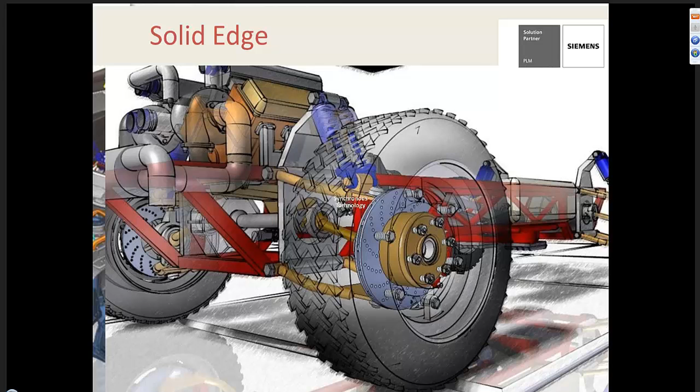Solid Edge, while a complete 2D to 3D CAD solution, is different from other systems you may be familiar with. We offer synchronous technology for accelerated design, faster revisions, and better reuse of imported data, and many other areas like production-driven drafting, integrated analysis, and a full suite of products within the Velocity series to help you improve your complete manufacturing process.

So I wanted to take a look at synchronous technology. Of the technologies available, we're most familiar with history-based modeling. They use a feature-based approach for create and edit and generally are dimension-driven, so automating model changes are reliable and predictable. However, achieving any predictability requires a tremendous amount of flexibility in planning out how to edit is going to happen. Any changes outside the planned modification results in a tremendous amount of rework, and we all know the performance issues that this technology suffers from.

On the other hand, there are history-free modeling systems, also called explicit modelers. They are featureless and offer little in terms of automated design with dimensions or relationships. They are fast and flexible and accommodate a wide variety of changes, assuming the proprietary geometry kernel can handle such modifications. So with synchronous technology in Solid Edge, it incorporates the best of both worlds by combining the speed and flexibility of an explicit model and the precise control of parameterized modeling design.

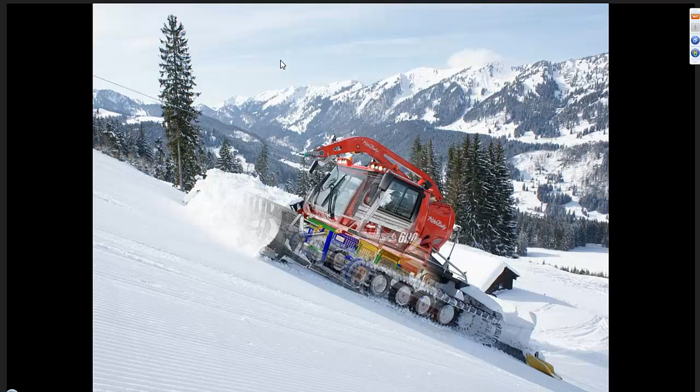I can see your screen, Kevin. Go ahead.

Okay, great. What we're going to do today is go through an overview of Solid Edge and talk about the points that Amy had mentioned this morning about being able to accelerate your design, make very fast revisions, and also show you how you can reuse data from other CAD systems.

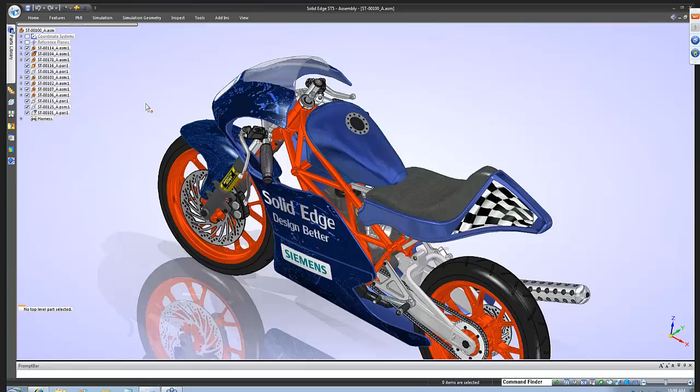We're going to be utilizing this motorcycle as the basis of our demonstration this morning. This particular motorcycle is a real motorcycle that was designed at a local community college over in Spain. Today we'll show you some of the tools Amy mentioned, like synchronous technology, working in the context of the assembly, modeling components, and then showing how you can create your detailed 2D drawings. Solid Edge has some very extensive rendering tools to create photorealistic images of the models you create.

You'll notice you can get nice things such as reflections. You can also apply realistic textures to your models as well. These can be very handy when you're creating documentation or manuals within your company.

What we're going to do today as well is show you how you can work within the context of the assembly. Solid Edge has some really great tools for when you need to display specific components. What I'm going to do right now is show you the framing components and turn off the other parts that I don't need to see at this time.

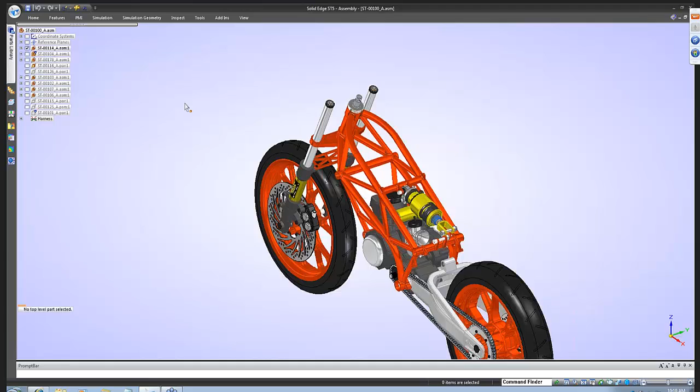This is going to help us in the design process of modeling the yoke for our front forks. You'll notice I can go into the context of the assembly to start creating these modeling components.

You'll notice we can display them as a reference, and as I mentioned before, we're going to design the yoke here for the front forks and utilize synchronous technology to do that.

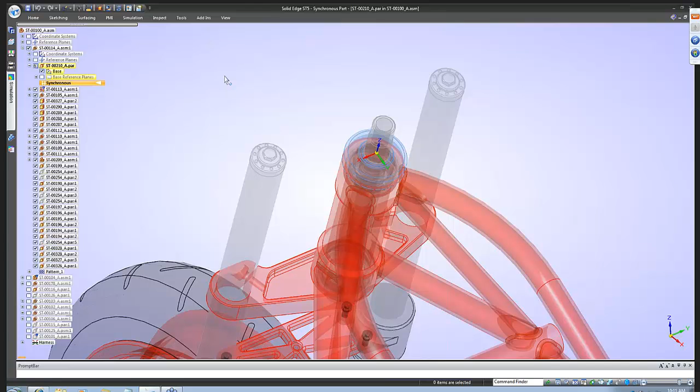What's nice about being able to design in the context of the assembly is we can reference locations of other parts to make sure we're designing this so it fits in the context of the assembly. So notice how I can reference geometry from these existing components.

At any time, I can turn off the display of our components and just focus on the design at hand. 2D users are very used to designing and placing dimensional information on their 2D geometry. I can also not only reference that, but place dimensional information relative to it as well.

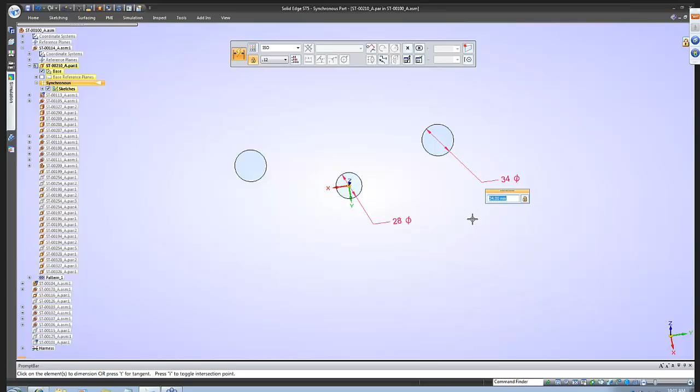Notice how, utilizing the same dimensioning tool, I can place different types of dimensions. For example, I've placed two diameters for the locating circles of the mounting holes, but I can also use that same tool to place locating dimensions. That's very flexible about the system, not having to select different commands to do the same thing. We'll place one more locating dimension to specify the distance between the two front forks.

We can also create additional detail as we go through and create additional geometry. Notice as I right click on the screen, I have access to 16 different commands that I use very commonly. You'll notice I can access the circular command to place additional geometry, and we can go through very easily and snap that geometry to existing geometry to create additional detail.

I'm going to place two more circles on top of our existing geometry, and notice how they not only snap down but also create the appropriate dimensional information for that geometry.

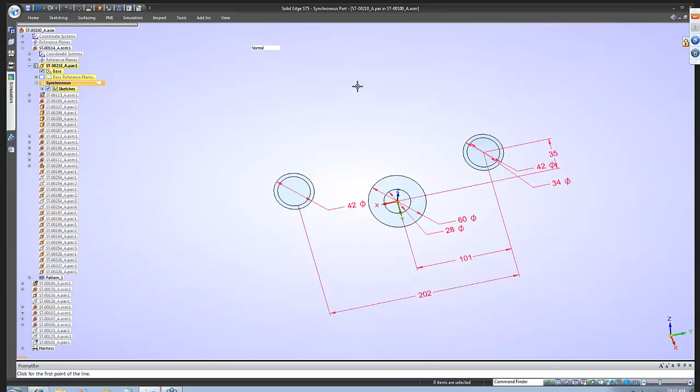We'll place some additional elements to help us in the design of our part. As you're creating geometry inside of Solid Edge, you get instant feedback on the screen, so I can tell, for example, when I'm touching other geometry. I can also tell if I'm tangent or related to other geometry in different ways. You can see here I'm touching and tangent to the circle, which allows for very fast, flexible 2D geometry creation.

We'll do one more element here, and again you'll notice how I can snap down to the circle. What I'm going to do purposely is make that tangent to the circle, but have the geometry fall off of the circle and not make it precise, and you'll see why I can do that here in a minute with Solid Edge.

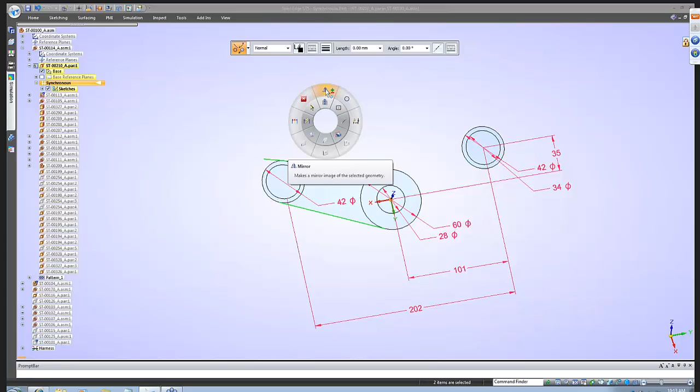I want to take this geometry I just created and mirror it over to the other side. Again, these are very common tools when creating 2D geometry—not only being able to create it, but also do things like mirror it over to the other side very easily. Let me grab that geometry, and we'll mirror it about the XY plane, or the Y axis, I should say.

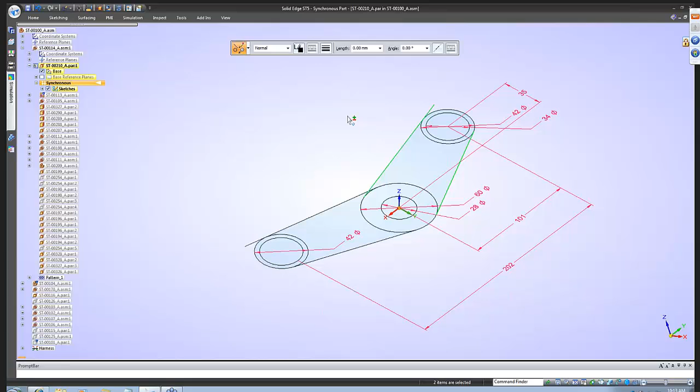What we've done with synchronous technology is we've incorporated what we call a region concept. So I've got the 2D geometry created, and I can select the geometry very easily and specify that I want to take this and extrude it some distance. Notice how as I grab the region, even though those lines aren't connected up there at the top, I can just specify that I want to extrude those down 25 millimeters, and Solid Edge will automatically trim that geometry for me.

So it's very easy to create, very fast and flexible to create that geometry as well, and get it to do exactly what I want it to do. You'll also notice that the 2D dimensional information that we placed on the geometry automatically connects itself to the 3D model, and you'll see why that's important here in just a few minutes. For now, I'm just going to turn off the display of those dimensions and focus again on my design for the yoke.

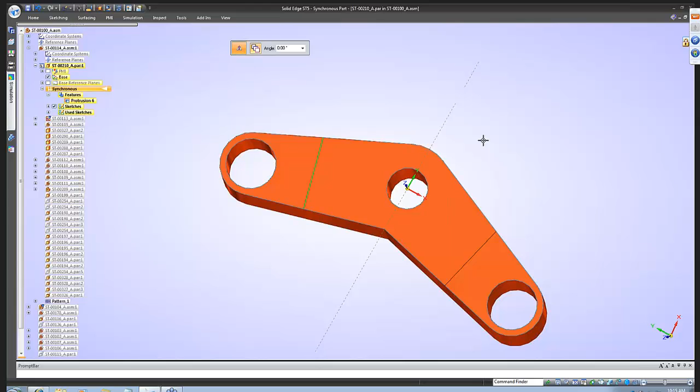Again, I want to create some additional geometry. This time I'm going to do it directly on the part. And again, you'll see how we can easily detect where this geometry is relative to other elements. You can see in this case I'm perpendicular to that element. And I also want to go through and just mirror this over to the other side as well, about the y-axis this way. Again, it creates that region, and what I want to do is take the middle portion of this and just extend it up. I just simply select the region and specify that I want to extrude that up, in this case 30 millimeters. And you can see I'm starting again to create some additional geometry for my design.

I want to do a very similar thing on the bottom side, and again I can borrow geometry that exists already just by simply selecting it. So in this case, we'll come up and select the geometry we just created and copy that to the bottom face. And again, that gives me the ability to take that region and either add additional material by moving my mouse cursor down, or if I extend it into the part, notice how Solid Edge will remove that material automatically for me.

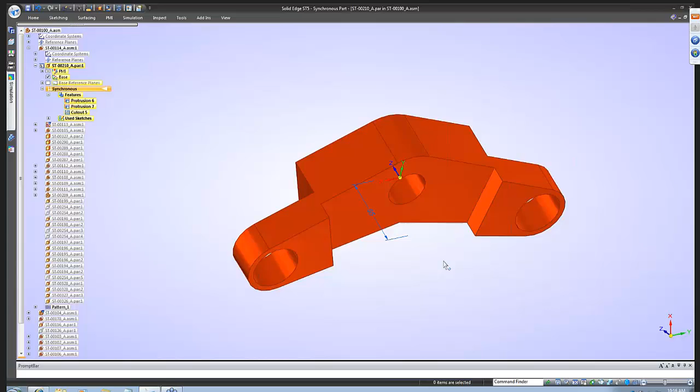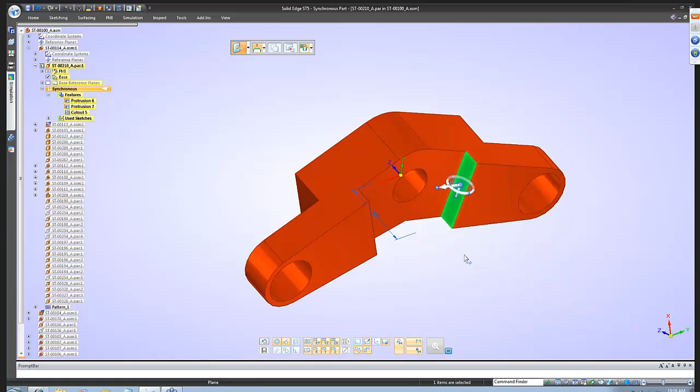What's nice too about utilizing synchronous technology is we don't have to concern ourselves with how we've modeled the part up to this point. We have direct interaction with the model. So you'll notice in this case, maybe I want this cut out here on the bottom section of our yoke to be a little bit smaller in width. So I can easily just take the face there and just simply grab it and extrude it in. Notice how on the opposite side it's recognizing that we have symmetry in our model. So I can go ahead and extrude that simultaneously just by simply selecting the face and pushing it over.

I can also come in at any point in time and place dimensional information on the part. So maybe in this case I want that to be 25 millimeters. So at any point I can place the dimension on the model directly and have it be the values that I've specified.

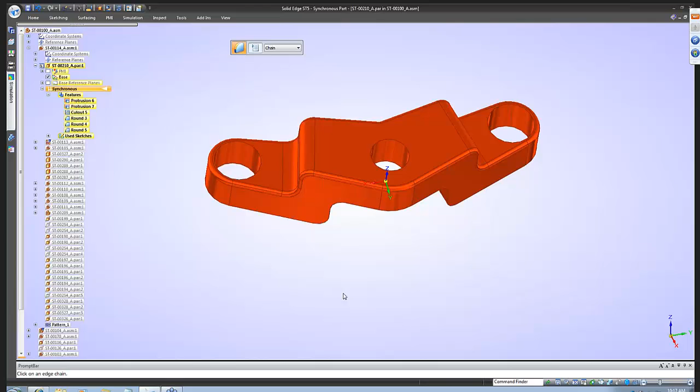So we have the basis of our design. Let's go ahead and add some additional detail. Obviously we don't want those sharp edges. We can go through and just start selecting edges and rounding them to values that we want them to be. In this case we'll make those 10 millimeters. We'll do the same thing here on the outside. And then as opposed to just individually picking edges, I can also pick a chain of edges and have those round as well. You'll notice how it goes around the entire perimeter of that upper edge.

So we've rounded our edges, but as I look at the part, you'll notice that it's very orthogonal. I might want to add a little bit of taper or a little bit of draft to the part. What's nice, again, with Solid Edge is I can just grab elements off of the model and utilize this editing tool. You'll notice it looks kind of like a steering wheel. I can grab it and place it at any location on my model and start editing the geometry. So maybe in this case I want to add a little bit of taper to those edges.

As I grab just those two single faces, notice how it recognizes symmetry with our live rules. So maybe I want to add a 20-degree taper to those walls. And as I look at this, maybe we have a little too much clearance here in the middle.

So I may want to take that and make it a little less of a clearance there. I can grab that geometry and just push those faces towards the middle, without having to be concerned with how I modeled that part originally. It gives me direct interaction with the part.

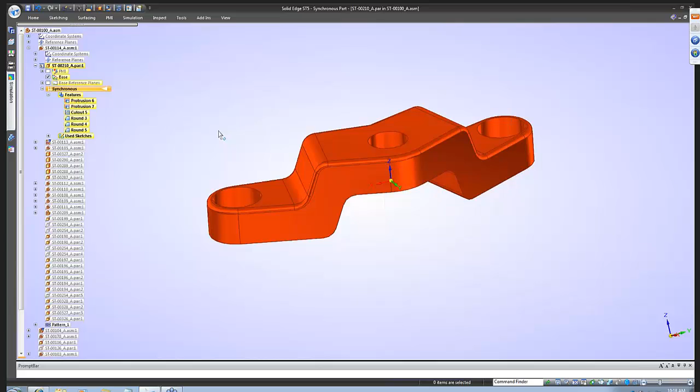Now the other thing in regards to modeling components is I may want to specify what this is made out of. Solid Edge comes with an extensive library of materials, so maybe in this case I want to make this out of aluminum.

All of the material properties are associated with the list of materials, and densities, specific heats, all the items you see listed here are automatically applied to that material, and that's going to help us in detecting things such as weight.

You'll also notice we come with different properties. So if you want to specify specific information about this part, for example we're calling this the fork yoke, you can also key in other information such as who the author or designer is of this component, and project information such as document number, revision levels, project names.

You can also specify how you want to detect things such as weight. How do I want to look at this? Maybe I want to calculate the weight of this part in pounds as opposed to kilograms. So you can change any of this information on the fly.

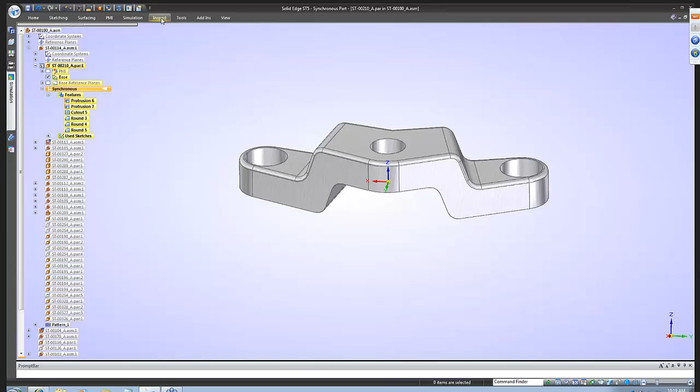Having done that, we'll go ahead and look at the properties of this part, and you can see at this point we've got a mass of just a little under 2 pounds for this particular part, calculated based on the material specification.

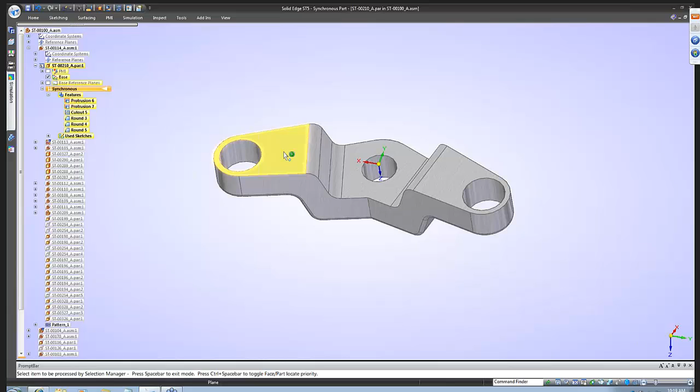That weight is a little too high. We might want to go through and remove some of the weight off of this part. So very easily I can tell Solid Edge to get rid of that. I'm just going to select the bottom faces of the part, and I just want to remove all of the internal material.

What's also nice about Solid Edge is if you come from another CAD system and know terminology, you can say to yourself, well, I just want to shell out this particular part. If you're familiar with terminology from other CAD systems, you can utilize the terms you're familiar with.

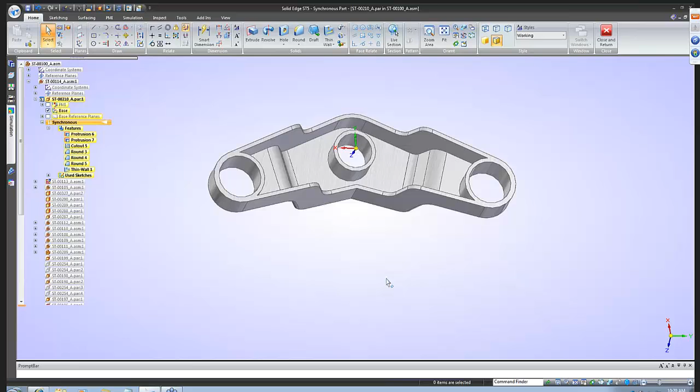Notice at the bottom of the screen I'm typing the word shell. Solid Edge doesn't have a specific command called shell, but it recognizes that terminology and finds the appropriate command. In this case, it recognizes that I want to do what we call a thin wall. Notice how not only does it find it, but it also executes that command simply by picking on the found command, and it does exactly what we want it to do.

Having done that, I can now see, having removed that internal material, we've got a mass of just over half a pound, which is a lot closer to where we want it to be. I'm going to close out and go back to the assembly.

We can go ahead and look at how our part is interacting with the rest of the assembly, and we can see we've got some good fit here. Let's look underneath, and as we zoom in, we may want to make some changes to our part. What's nice about Solid Edge is we can do that right from the context of the assembly.

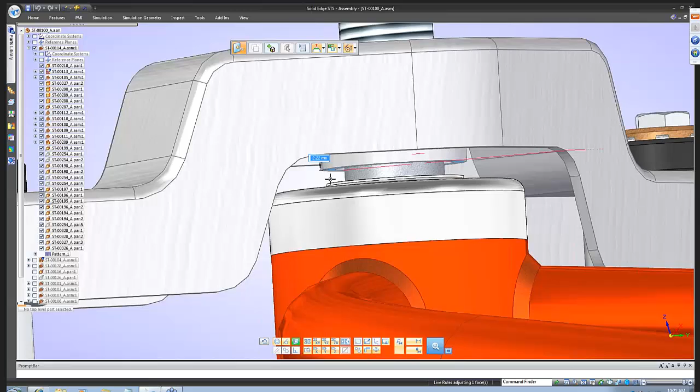So I may want to extend this internal boss down a little bit. Notice I can grab the face right here from the assembly and tell Solid Edge I want to extend that down. I can grab key points off of other geometry, so I'm just going to grab the center point of that upper circle, and I can modify the part right here from the context of the assembly. Let's zoom up a little more on the top level here.

You can see in this case our hole might be a little bit too big for the center post here, and I can get information off of other components as well by simply tagging them. We can see that the diameter of this stem here is about 22 millimeters, and if I select the hole in our part, you can see that that's 28.

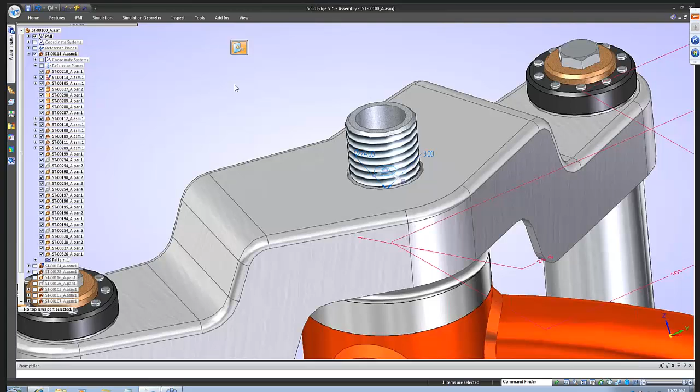It's probably a little bit too big, so again, I can modify this part very easily right here from the context of the assembly. We'll go ahead and save this part.

What's also nice about Solid Edge is we have the ability to do simulation. We can specify, is this part really going to work? What's going to happen to this part in normal operating conditions? What I can do very easily is start doing some simulation or finite element analysis on this part.

Let's go ahead and open up this part by itself. What Solid Edge has is a built-in tool called Solid Edge Simulation. It's going to allow us to do a lot of different work to this part, do the analysis to make sure it's not going to fail out in the field.

Before I do that, I'm going to go through and place a couple of chamfers on these upper edges of these holes. So let's grab this upper edge here as well as this one over on this side, and we'll go ahead and add those chamfers there. So as we look again towards the inside, now that we've shelled out the material, we might want to check to make sure that this part's not going to fail.

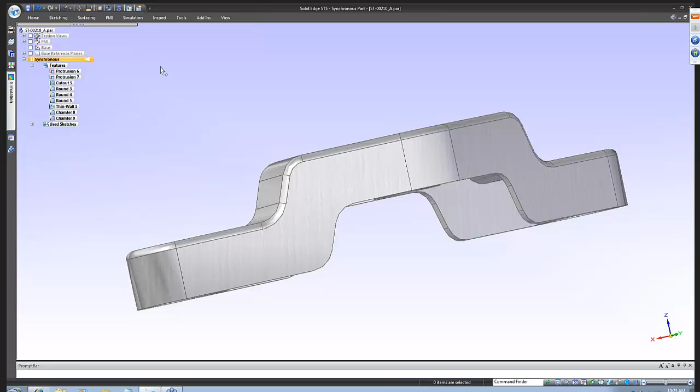We might want to check to make sure that this part's not going to fail, so I can do some simulation very easily on this part.

As we look at the part here, you'll notice that we can do a number of different things as far as applying different types of forces. We can also apply different constraints and then see exactly what type of deflection we might have in the part and see where the critical stresses are going to be.

So in this example, what I may want to do is just create a new study, and Solid Edge has different types of studies you can specify, whether it's linear static, if you want to find the natural frequencies with normal modes, and we also have other options with buckling and steady state heat transfer. We'll go ahead and do just a linear static study in this case, and you can also specify different types of mesh, and we'll utilize tetrahedral in this example.

Now that we've defined the geometry, you'll notice that the material conditions come across from Solid Edge into the simulation study, so there's no need to reapply what type of material we're utilizing. Then we can go through and apply different types of loads. In this case, I'm going to apply a structural load and just apply a force to the outer holes of our yoke, and we'll do a 10,000 Newton load.

We'll also apply some different constraints. We'll do a fixed constraint here on the center post hole location, and then apply some other constraints. Maybe in this example we'll do a cylindrical constraint on these two outside holes. Up here you'll notice we have other options - if we want that to be free to slide along the axis, we can make it fixed or free to slide, and we'll go ahead and apply that as well.

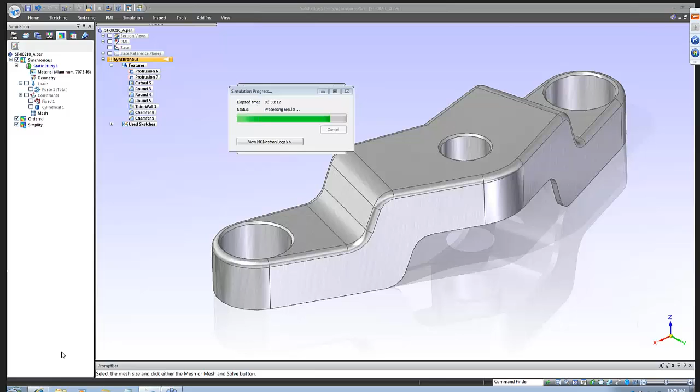The Solid Edge simulation tool utilizes the NX Nastran solver, which is used by a number of different applications, so it's very reliable. It's going to give you very good results when you're specifying exactly what you're trying to accomplish in your study. As it goes through and calculates stresses, strains, and deflections, it automatically gives good feedback on the model.

Now, the deformation is based on a percentage. It's exaggerating the display of what's happening to this part, and we can change that with some settings here. I'll change this from 10% to 2%, to make it look a little bit more realistic as to what's happening with the model.

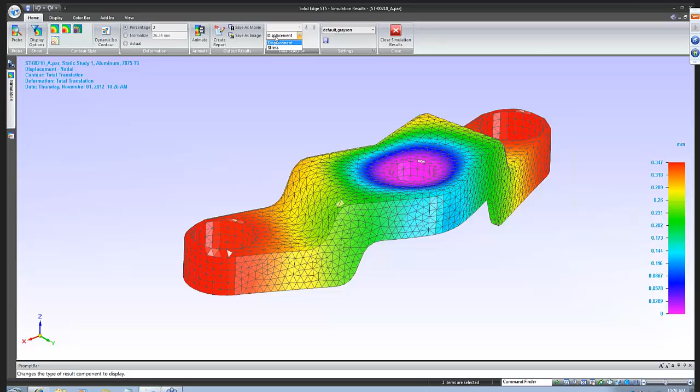So you'll notice we can see where the high strains or stresses are located based on our current design. We can also see things such as displacement - how far the part is being deflected with those forces applied. The higher displacements are here on the outer edges, and if we go back to the stress graph, you can see stress concentrated near the hole of our fork position.

We may want to make some modifications to eliminate some of these high stress areas. Before we do that, I'll show you how you can animate exactly what's happening in your model, showing the deflection and stress areas from the initial state to where the force is applied.

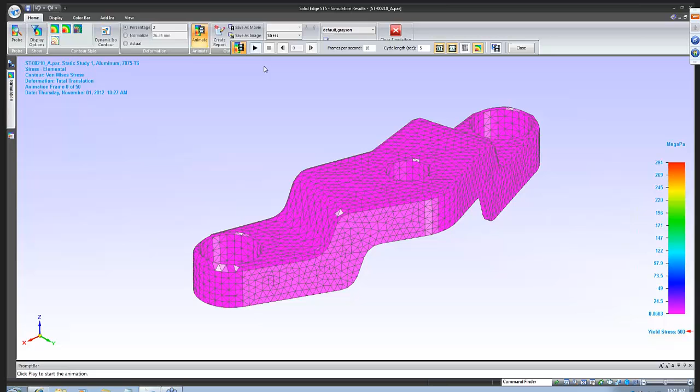And you can save out this information as a movie for communication, maybe with a customer or maybe to your sales folks. You can see a number of other options here, which we'll get to in just a second.

I'm going to close the results, and again, just to show you our high stresses, roughly 294 megapascals, and you can see kind of on the lower end as well where those are, and we might want to eliminate some of that. So what we can do inside of Solid Edge is go back and make modifications to our design.

We have a library here. I have some support ribs that I may want to place inside of my model. This is what we call a feature library - it allows us to take different features or elements off of designs we've created in the past and store them to a library for reuse later.

As I drag those out from the library, I can easily tell Solid Edge where to place those, and I'm going to utilize this tool here to place them exactly where I want. You can see that we've placed them in.

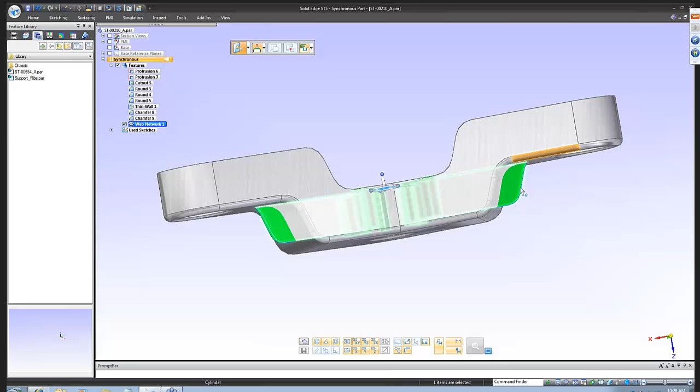Now, the design these ribs came from was from a part which might have been a little bit bigger, but that's okay, because Solid Edge will allow us to utilize those and have them automatically attached to our new design. Notice how those ribs are no longer extending out of the part, but conform to the geometry of our part as it is today.

So again, some nice tools that allow us to reuse features we've done in the past. Having created the rib structure, now we can go back in and reapply or remesh the part and do another solve to see if that's helped with our high stress areas and deflections. This will go back through, remesh it to the new geometry, and give us our new results.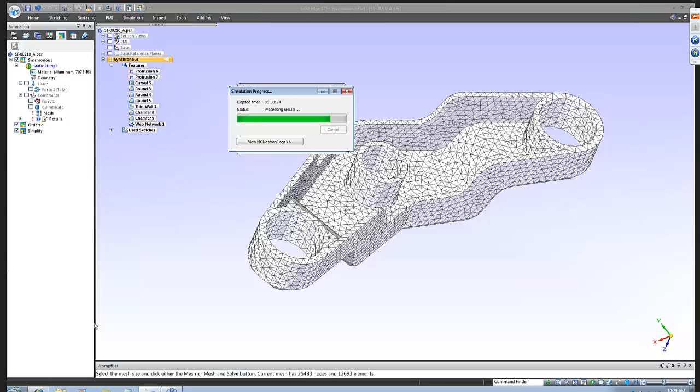So again, you'll see the rib structure remeshed here, and you'll also see, hopefully, as we've applied the new rib structure in the interior, how it's going to eliminate not only the deflection but also the high stress.

So here are our new results, and you can see as I flip the model around, the high stress areas are now gone. We went from just under 300 megapascals to 117, so it looks like the changes in our design have helped us in those areas.

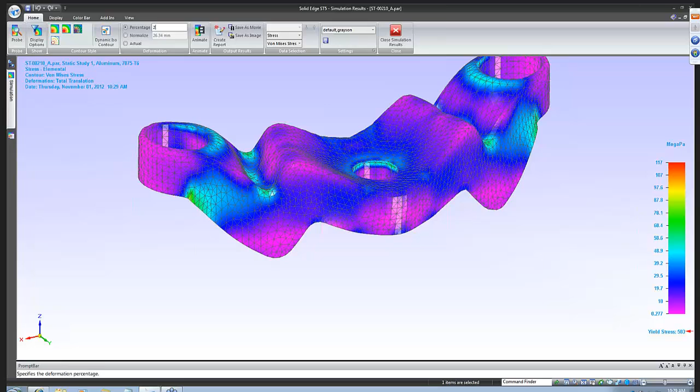Now, what's also nice is we can go back through at any point in time and not only make those changes, but also generate report information. And I want that to be 2, not 20 - it's a little bit more exaggerated than what I was looking for.

But here we've had some built-in reporting tools. What's nice is I can specify who the author is, what the name of the report is, and as I generate the report, Solid Edge will automatically capture the information we've studied so far. You'll notice it's going through and capturing the information, and then automatically generates a report for us.

As I scroll down through the report, you'll see all the different material conditions, the load values, and it also captures pictures from the study so we can generate a nice report and present those results to whoever our audience is, whether it's our customer or internal folks within the company. Very powerful tools that you can utilize.

These are built-in tools in Solid Edge to help make sure your designs are going to work as you anticipate. We'll go ahead and save what we've done with the part.

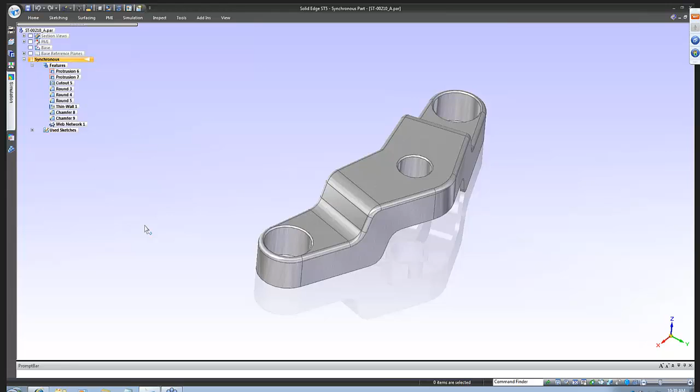What's also nice about Solid Edge is we have the ability to go directly from a part to creating the 2D documentation. It's nice to have the 3D model, but we also need to generate the documentation, the manufacturing information for how this part's going to be created. Right from our part, we can tell the system to go ahead and create a drawing. Solid Edge utilizes what we call quick sheet templates.

A quick sheet template could be simply a drawing template with predefined views. If you know you want to document your part models with a front view, a top view, an isometric view, and maybe a section cut, you can predefine those templates. When you go to create the drawing, those views will already be specified in your model.

The other nice thing about a quick sheet template is you can also have it automatically extract any dimensional information specified in your model. So it not only creates the 2D drawing views, but also extracts all the information we already applied to the 3D model, eliminating redundant work with having to apply those dimensions again in the 2D drawing.

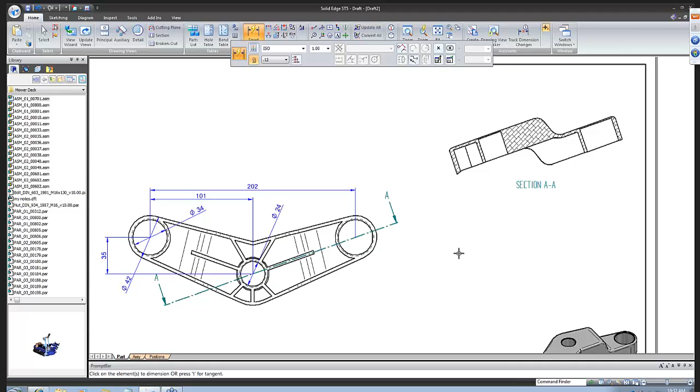If you need to add additional dimensions, that's okay, because we utilize the same dimensioning tools here in the 2D drawing that we used inside the 3D model. So from a usability standpoint, you're not learning new tools for dimensioning. I can still specify the radius of this outside edge, or if I want to specify the angle of this part, I can do that too. We'll show you that here in just a second.

I want to create some additional views—maybe get a little more detail for some of the rib structure up here. So what I may want to do is create an auxiliary view. Just by snapping that auxiliary line down to the model and pulling the model up, it'll create that auxiliary view for us automatically.

I may not need to see the entire view, so we also have the ability to crop the view and just show exactly what we want to see. Then I can move that to any area of my drawing sheet and place it exactly where I want it. From the auxiliary view, I can also place some additional dimensions.

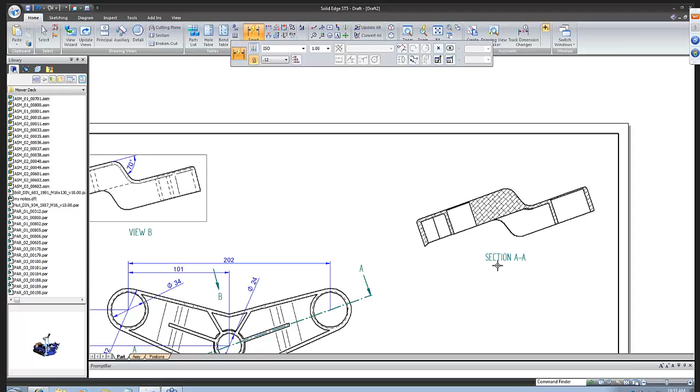Utilizing the same dimensioning tool we looked at earlier, maybe I want to generate the angle of this edge, or get some other information from this section view—maybe specify the rib thickness or the thin wall. I can just grab the elements themselves and have Solid Edge generate that dimension for me.

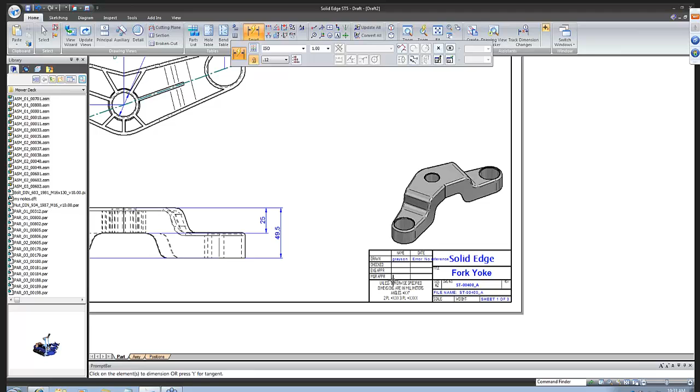You'll also notice that Solid Edge will extract the property information we saw from the model, so it can automatically fill out your title block. In this case, it extracts the title, the drawing number, and you can also have it extract any piece of information you've applied for that particular part.

Detail views are also very easy to create. I simply create a circle on a drawing view, and it automatically blows that view up and scales it up or down based on the detail we're trying to get. The detail circle is also very dynamic, so if I need to move it to any other portion of the drawing view, the detail view over here will automatically update for us.

Again, if we need to place some dimensional information or get some different detail out of the part, we can do that here as well. So creating drawings inside of Solid Edge is very easy to do. Everything is connected back to the 3D model, so if we made any dimensional changes or design changes to the model itself, that would automatically be reflected in the drawing as well.

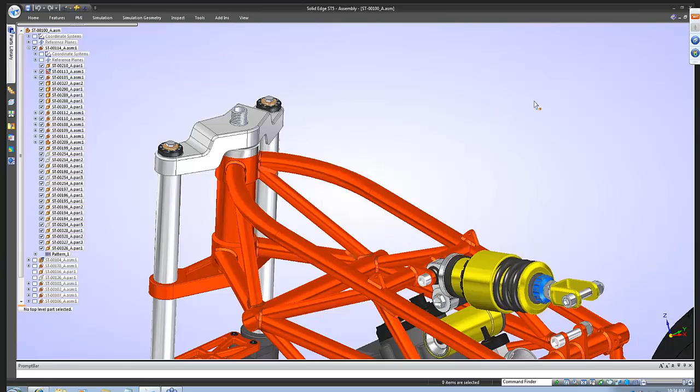We'll come back and do some additional work in the 2D drawing a little bit later. What I want to show you now is the ability to go through and reuse data that you may be getting from a customer or a supplier, which may not be of Solid Edge format. I want to show you directly from the File Open menu how Solid Edge is capable of reading in data from other CAD systems.

As you look towards the top of the list, we have Solid Edge native files, and you'll also notice that we bring in files from other systems. From a 2D perspective, if you have AutoCAD files today, or get AutoCAD files from a customer or supplier, we can open those up directly. As we move down the list, you'll see other recognizable CAD formats such as Inventor, Pro-E, SolidWorks, and we can open up those files directly as well.

The example I want to show you is opening up a SolidWorks part file. This comes from a supplier that we use for our design - it's basically going to be a linkage to our swing arm here in the back. I want to open up the file that's been provided to me and show you some tools that Solid Edge has that will allow you to work with that data. So again, we're bringing in a non-native Solid Edge file.

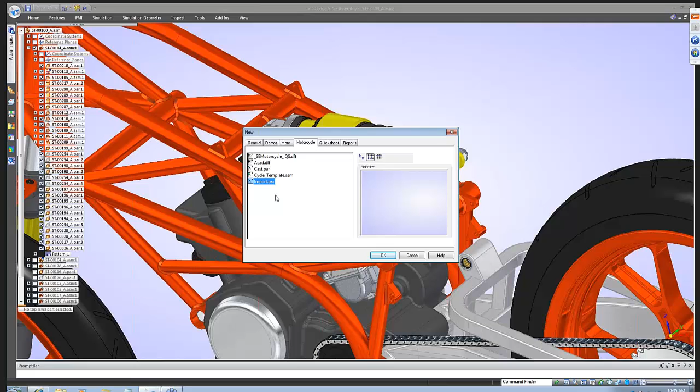This is coming from SolidWorks. I want to go ahead and open that up and show you some ideas and tools that we have that will allow you to work with this data.

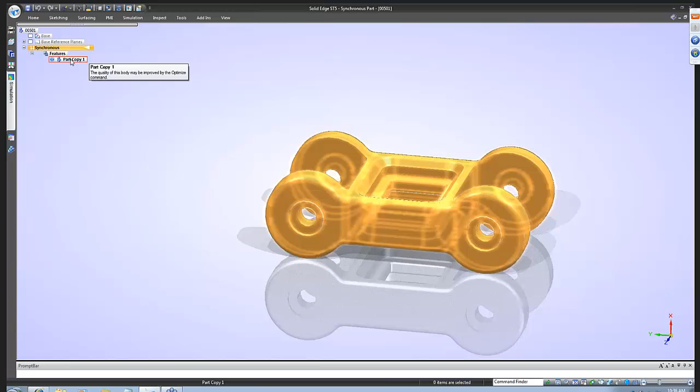Unlike native Solid Edge files, which have a feature recipe here on the left-hand side, when you import data in from other CAD systems, you're left with just what we call a body or a part copy - basically a mixture of all the different features that came from that CAD system. We do not have the specific features such as the holes or the protrusions, just one big chunk of material. You'll notice that Solid Edge has some tools available that allow us to work with the data.

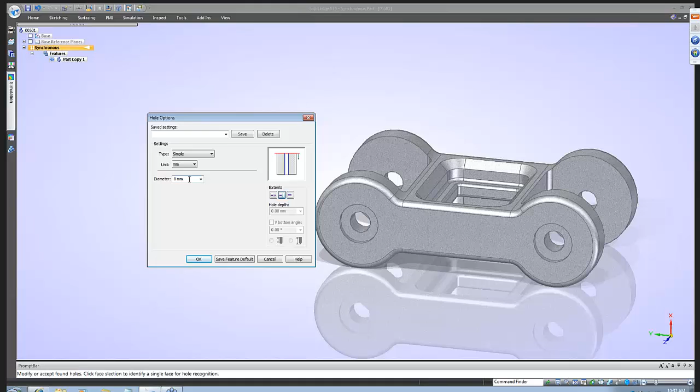The first thing I want to point out is these counterbore holes. Solid Edge has different tools that allow us to recognize the data from that geometry. As I go to our tool called Hole Recognition, Solid Edge will say, okay, I recognize these to be counterbore holes. Maybe for my purposes I don't need them to be counterbore holes - maybe I just need them to be simple holes. So I can very easily go through and tell Solid Edge to change them from counterbore holes to simple holes with a different diameter, and as I do that, you'll notice how the geometry automatically updates for us.

The other thing I may want to do with this part is, I don't have the individual features, but I can still manipulate it with common things such as placing a dimension on the model. This is one thing Solid Edge has that other CAD systems don't give you the ability to do - place dimensions directly on the model. In this case, I want to place the distance between those two holes, place that dimensional information directly on the model, and then make modifications to the part.

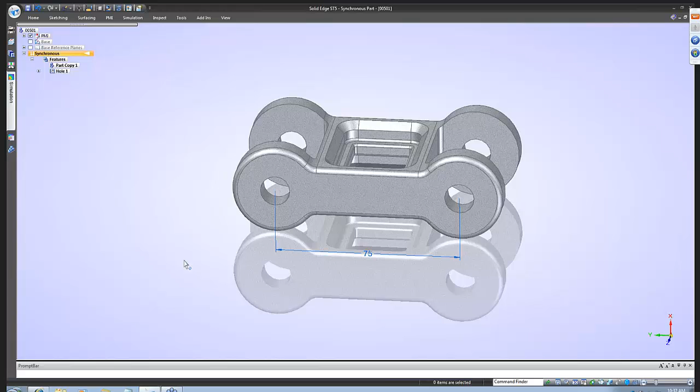So one way I can do that is simply select the geometry and utilize our editing tool here to do something like a stretch. If you're coming from a 2D world, you're probably familiar with being able to stretch geometry on a drawing. I can do that same type of application here inside the 3D world. Notice I just grabbed the outside portion of the model and I can stretch it - maybe I want to stretch this 10 millimeters and make this a little bit longer.

Or I can also do the same thing by changing the dimensional information. Right now this is a 75 millimeter dimension - maybe I want to change this from 75 to 72. So I can make that change either directly with stretching or by placing or changing the dimensional information.

So again, notice how as I change that dimension from 75 to 72, it'll go through and make it shorter for us.

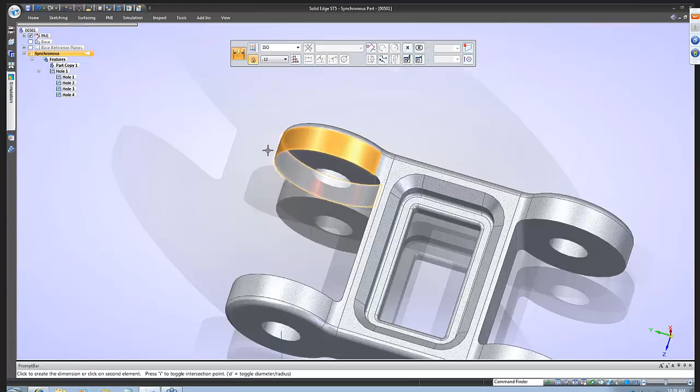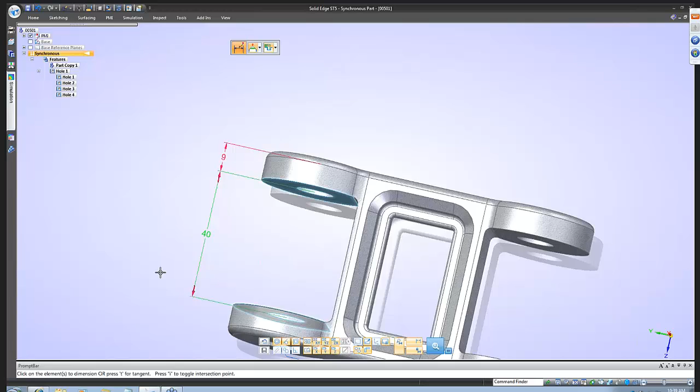I may want to place some other dimensions on the model for critical information. Maybe I want to specify the width of these ears, so I can grab the edge information and make those 9 millimeters. I can also place a dimension to specify the width between the two ears, maybe going from 40 millimeters to 50 millimeters to make this a little bit wider.

We also have the ability to recognize other types of features besides holes. I can grab a face, and in this case I want to take away this internal cutout and add a little more strength to the part by adding that material back in. Solid Edge allows us to recognize that as a cutout, and I can simply delete that feature, and you'll see it adds the material back in. Even though I don't have that cutout feature on the left-hand side, I can still make modifications to it.

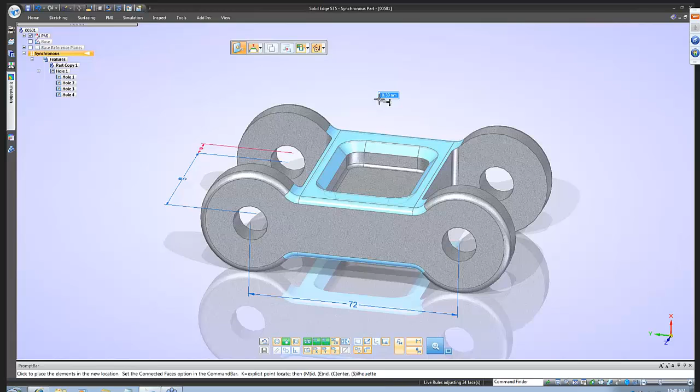The other thing I can do is make this a little bit thicker. I can grab all these faces here and extend them up a little bit. Using our editing tool, I can simply tell it to move those faces up a couple of millimeters, making it a little thicker and stronger for us.

So the point I want to make is even if you get data from other CAD systems, you still have the ability not only to read it in, but also to make changes to it to suit the needs of your application.

We'll go ahead and save this as well. Let's designate this as a Solid Edge file and give it a name. Then we'll come back out and show how we can use that inside of our design. We'll close this file and come back out here to our assembly.

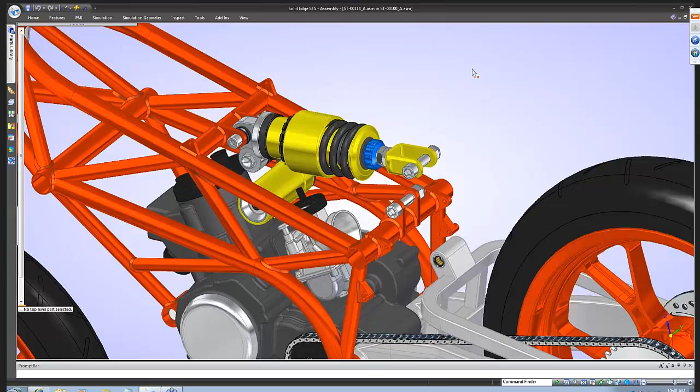Just to show you how easy it is to place parts into the assembly, we utilize a library technique. I go to my parts library and find the part we just brought in from SolidWorks, drag it in from the library, and start constraining it to other components. In this case, I want to take this face and mate it up to this other face on our other component, and it'll snap automatically for us. Then I also want to make sure the holes are lined up, so we'll have it align the holes as well.

What's also nice is I can dynamically move components just by dragging them or rotating them along an axis. Maybe I want to push this part back, and it's as though I'm putting my hand on that part - I can just grab it and move it as well.

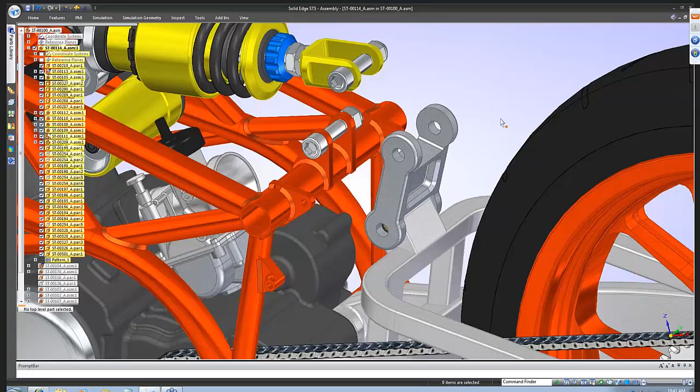So this is an example of bringing in foreign geometry from a 3D CAD system. Well, what about a 2D CAD system? I'll show you another example of how you can utilize existing 2D information. I have another component here which I need to connect the part we just brought in to our shock absorber. We have an existing 2D drawing of that part, but I want to create it as a 3D model.

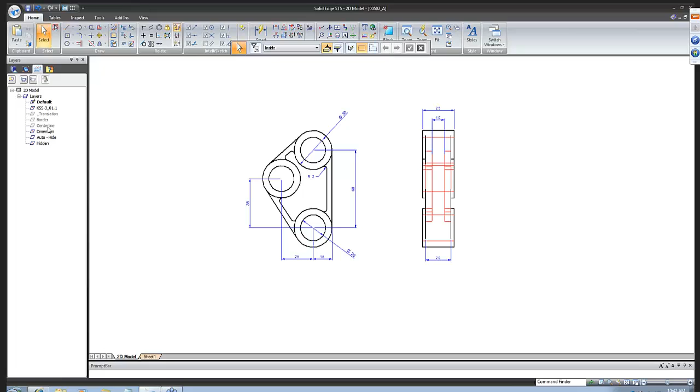I can come in and specify that I want to open up an AutoCAD file, and this time we'll utilize a DWG file as the example. What's nice about Solid Edge is when we bring in this 2D information, the layer structure comes across automatically for us. If I needed to hide a layer or change anything about it, I can do that - maybe I don't need to see the border or the center line, so I can hide those. The point is we can bring in the same layer structure from the original AutoCAD file directly into Solid Edge.

In this case, we have two different views of this part, and we have a tool inside Solid Edge called Create 3D. Create 3D allows us to create a 3D model from this 2D drawing. We can also bring in and utilize the existing dimensional information - whoever designed this part gave the critical manufacturing dimensions, and Solid Edge allows us to utilize those dimensions. So what I'm going to do is select the views off of our drawing.

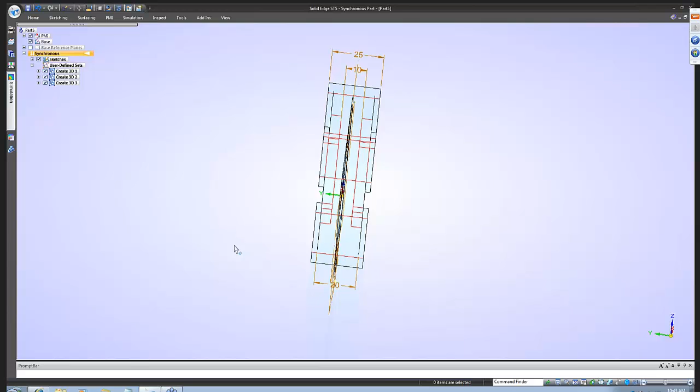What Solid Edge will do for us automatically is take that information, copy and paste it automatically for us into a 3D modeling environment. So it lines the views up for us. It brings over the existing dimensional information, and I can utilize it for generating the 3D model.

So what I'm going to do is utilize synchronous technology to grab regional information. We'll grab these three outer edges here, which represent the outer boundaries, and we'll extend those to their thickness. We can utilize the other view as a reference for us.

We'll do the same thing by grabbing the bosses. So we'll grab these three bosses and extrude those out the appropriate thickness, and again we can utilize the other view as our reference.

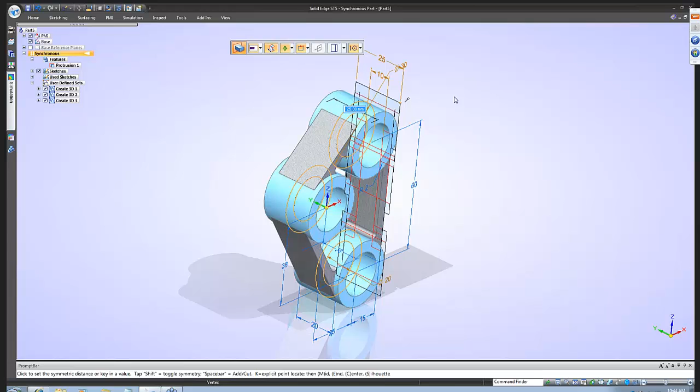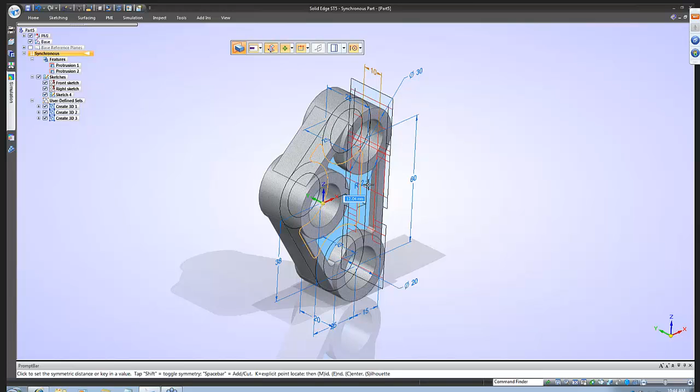And then in terms of the internal material, I can go through and specify that I want to reference that as well. So again, I can grab that, and this time, as opposed to selecting the other view, I can also type in that value. You'll notice I have the dimension up here that came from the drawing. I know that's supposed to be 10 millimeters, so I can simply type that in.

What I want to draw your attention to is notice how Solid Edge automatically brings the 2D dimensional information and automatically attaches it to our model. The benefit of that is I don't have to dimension that manually, but I can still utilize this information to make changes to the part.

I may want to go through and place some rounds and some chamfers on this part. Again, I have that same information here. So maybe I want to round all of the edges of my part, and we'll make that, let's say, 1 millimeter. But I don't want to round the internal holes here, so I can go through and remove those - we'll put a chamfer on those instead. So I can remove those and just round all the other edges.

And then we'll also come in with the chamfer in this case, and we'll just grab the hole information, so I can grab all of those faces and apply that chamfer automatically. So again, I've created some design intent here.

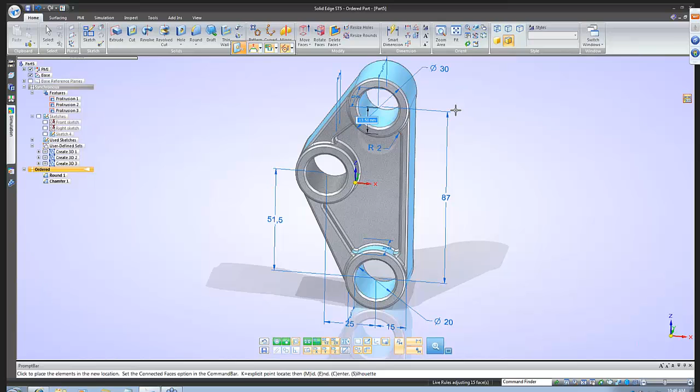The other thing I may want to do is make this part a little bit longer. What's nice about Solid Edge is I can stretch this information out and make this exactly what I want it to be. But what I want to draw your attention to is notice how our ribs are changing thickness here. We have some tools built into Solid Edge that will allow us to make sure we can make those changes very easily.

So I'm going to come back here and tell Solid Edge that I want to add some of my own design intent. Again, this came from an AutoCAD drawing, and as I'm creating the 3D model, I may want to specify what this rib thickness should be maintained to be. We have tools that allow us to do that very easily. So I'm simply going to select those ribs and tell it I always want them to be 4 millimeters from that outside face. So I can apply that in.

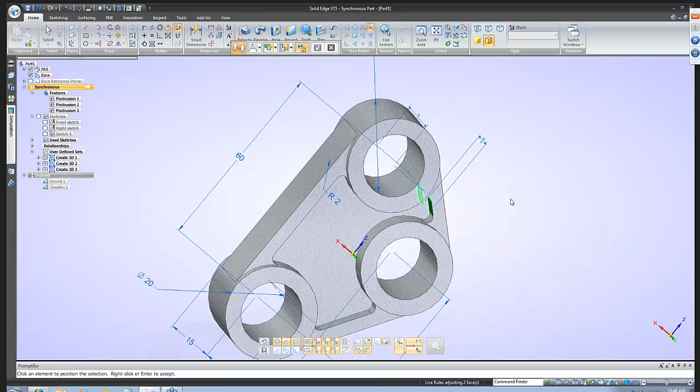I'll do the same thing for the rib structure up here at the top, and that's going to automatically build that design intent here. You'll see over here on the left-hand side, we've built in those relationships.

So what's nice about this is if I needed to go through now and make some of those changes, I can do that very easily. So if I want to stretch this up a little bit, make it a little bit taller, notice how the rib structure maintains its thickness there.

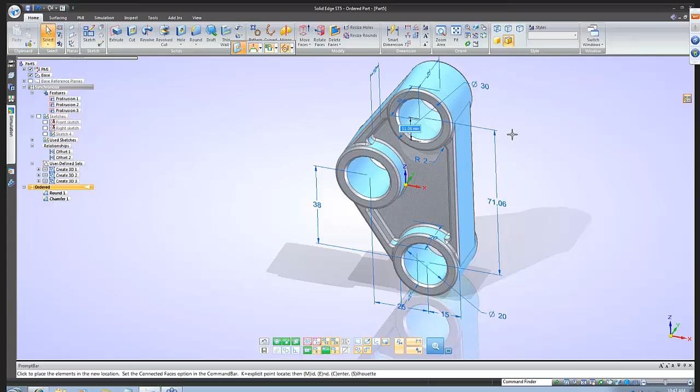So I can either stretch it up this way, or if I want to utilize the dimensional information to do that, I can do that as well. So maybe I want to go from 60 millimeters, let's say maybe to 75 millimeters. And then we'll make a couple of other dimensional changes as well.

So again, you can see how you have a lot of flexibility here in making those changes to your model. The other thing you can do is if you have a dimension that's critical, you can lock it. So if you want to lock it to a specific value as you're making changes to other dimensions, you have the ability to do that as well.

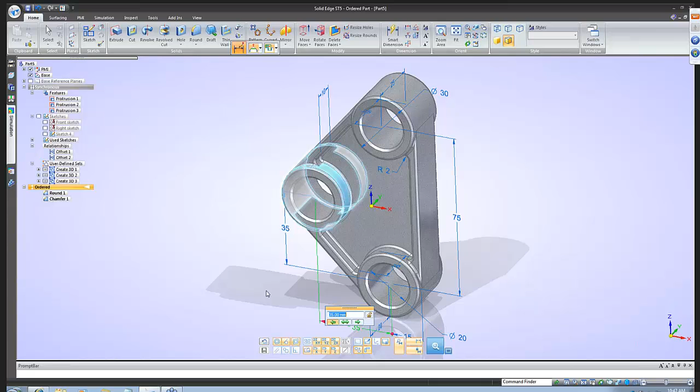So very flexible in placing any dimensions that you need. We'll go ahead and save this as well to our library.

I also need to place some additional components, some bearings, into these holes. What's nice is we saw before how we can create a drawing right from the model. We can also create an assembly file right from the model as well.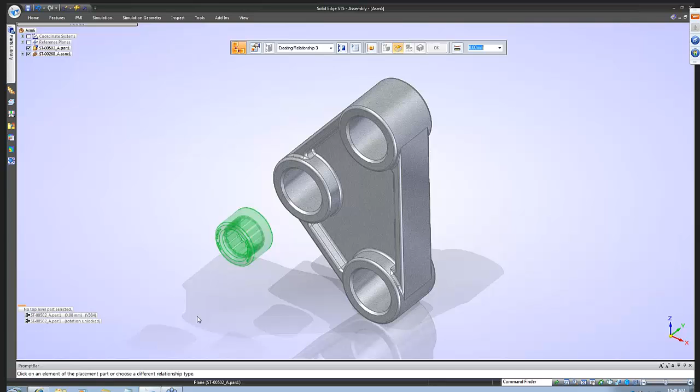If we go back to our parts library, I have some components here that I need to place inside. Just to show you how easy it is to place components inside the assembly, I simply drag the part in and tell it exactly where I need it to go. Once we have one of these in the assembly already, instead of going back to the library, I can just drag it in from our left-hand pathfinder and place a new one.

Another way of doing the same thing is we can also just copy that information. I'll take the one I placed at the bottom, and by simply holding the control key down on my keyboard, I can copy it up to the top hole. So many different ways of doing the same thing.

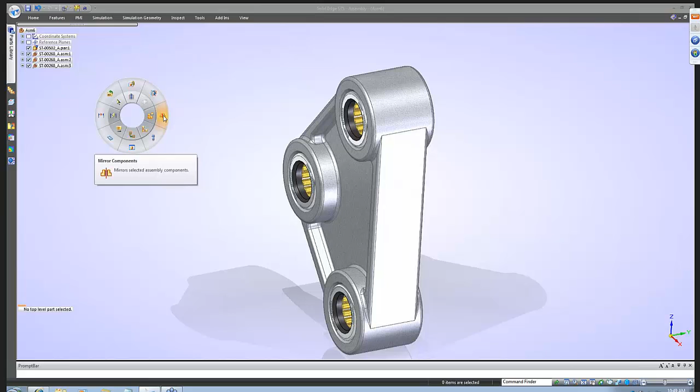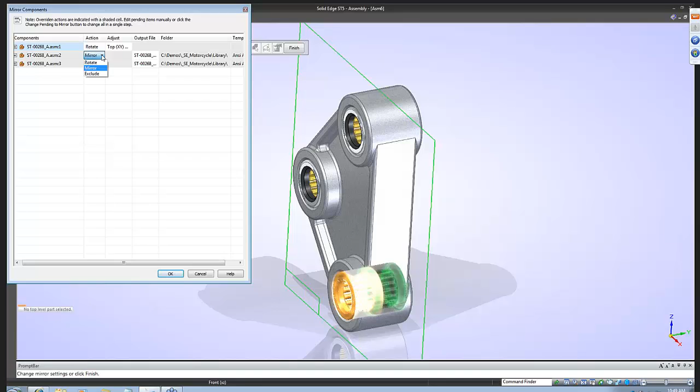So we've placed those in. We need the same components on the opposite side. Instead of placing them in three separate times, we can also mirror components. I'll select the three I've placed already and specify where I want to mirror them. In this case, I want to mirror them about the center of the part, and Solid Edge will automatically show you all the different components. Instead of a mirror, I just want to rotate those over to the other side, and Solid Edge will add the additional bearings for us.

So again, we'll go ahead and save this.

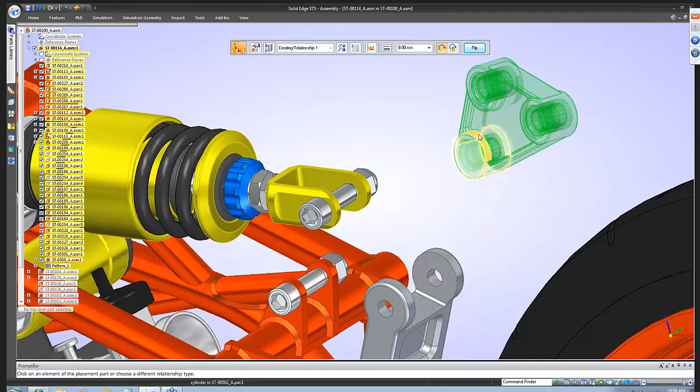As we come back to our motorcycle, we want to grab these components and utilize them in our design. We'll come back to our library and grab the assembly we just created, drag that in, and constrain these parts. Very simply, just grab the geometry and specify where you want it to go.

You'll also notice that we can place in different conditions for our assembly relationships. If I want to mate faces but also include some type of offset, I can type that value in right up front. Maybe I want to make sure that this face is 3 millimeters from this inside face, so we can have it positioned exactly where we want.

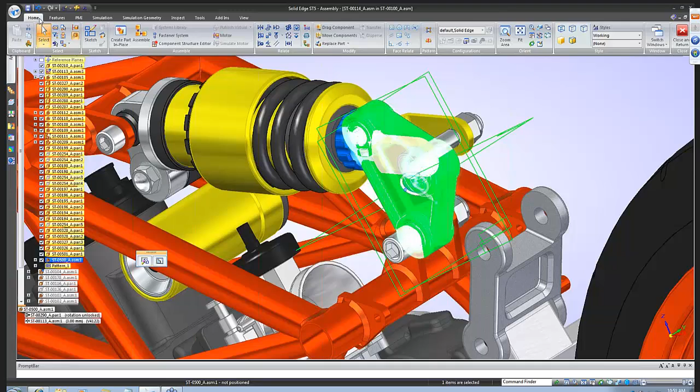I may want to come in and add some additional relationships to this. You can see we can come in very easily and apply it to other components as well. We'll take the cylinder here and line it up with the hole off of our other component. Notice how Solid Edge is flexible—it'll move the components exactly where they need to be, so that we've got a nice fit there for our rear suspension.

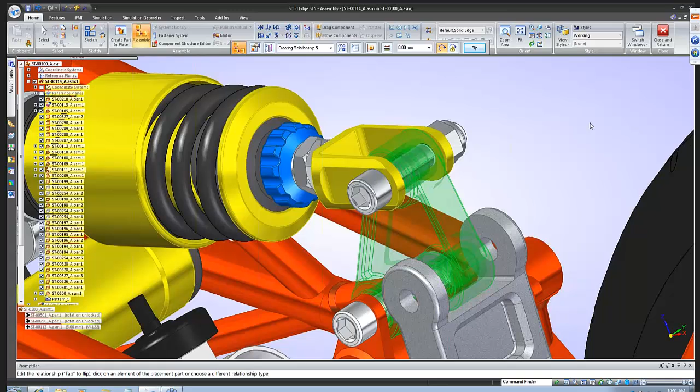The last thing I want to show you here in terms of the assembly is what we call fastener systems. Obviously, we need to connect these components together, so I want to show you some of the built-in tools we have for standard components such as nuts and bolts, and how we can link these parts together.

Solid Edge will prompt us where we want to place fasteners. I'm just going to select that hole there, and notice how it finds the other hole for us automatically. We'll go ahead and find the opposite side—we want it to extend all the way through this end. As we specify the holes we want to place fasteners in, Solid Edge will find components that fit inside that size hole.

We can pick from a standard group of socket heads, cap screws, or if we want another type of screw or bolt, we have a list of components here and select the one we want. We can also specify other information such as washers and nuts for either the top stack or the bottom stack of our fastener system.

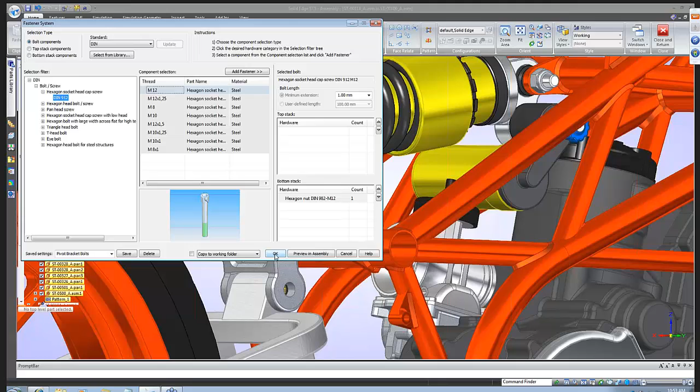Once you've selected the components that you want, you can also go through and save the ones that you've selected. So if I've selected a cap screw and maybe a hexagon nut for the bottom side, and we know we're going to use that in the future, we can save those settings so we don't have to pick them from our list every time. As we select those, Solid Edge will place those components exactly where we told it to.

Just to wrap up, we'll come back to our drawing and show you some other items we have available inside of the drawing. I'll go to a second sheet here, and again we have the capability of placing exploded drawing views, and we may want to get some other information from the part inside a parts list or bill of materials. We have the ability to easily tag the view we'd like and specify information we want to call out.

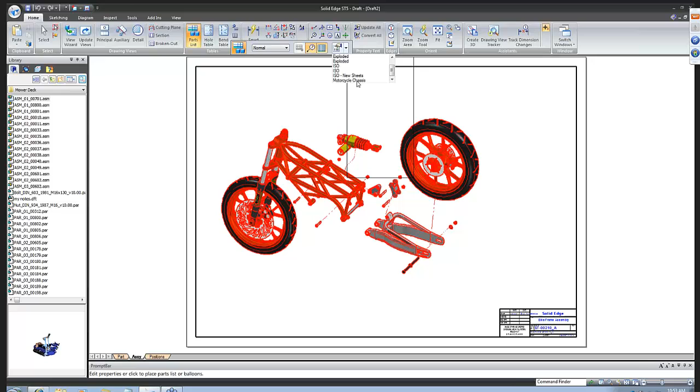So I want to get all the information off of the motorcycle chassis, and with a couple clicks of the button, Solid Edge will automatically balloon all of the components and then generate a nice parts list where you can get information such as item number, the title of the components, document numbers, and quantities. This list is customizable. You can call out any information that you want.

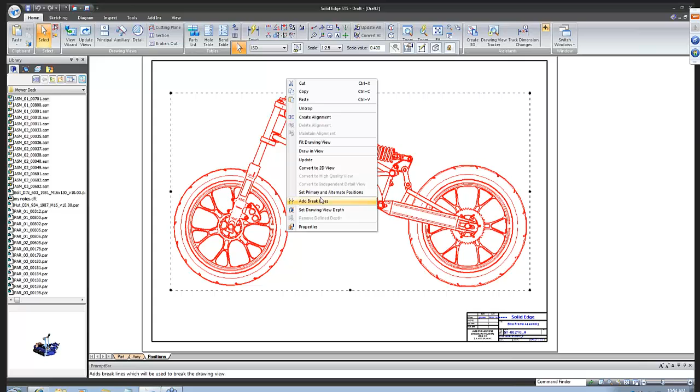Also, if we want to check the stroke of our components here, specifically the back side of our motorcycle chassis, if we want to check the rear suspension and the travel as it goes up and down when you hit bumps in the road, we can do that as well. If I grab a drawing view, we can also specify that we want to see different views of the same components.

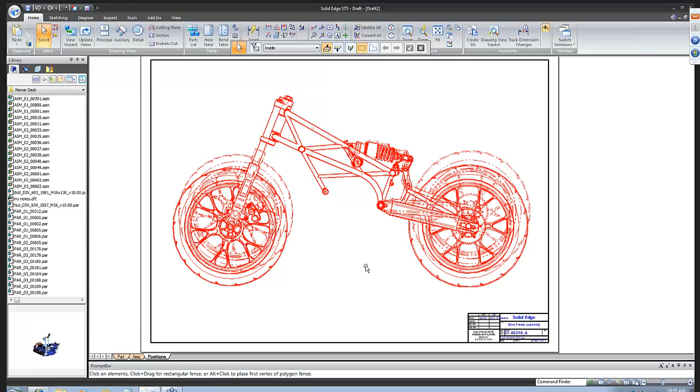You'll notice here I have an option for what is the full height, and what is the bottom height, and we can set up different views to be displayed simultaneously. The primary view will be displayed in one setting, and you can see other views here showing the bottom height. Again, you can get information between the two views.

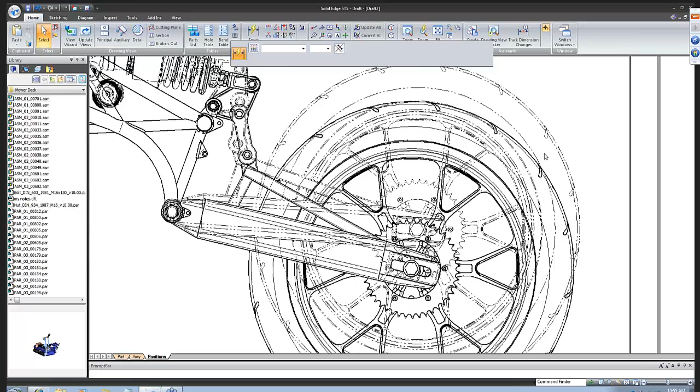For example, if I wanted to see the distance between the two heights here, I can grab that information and see what that distance is between the two views. Or if we go back to the back side of the wheel, we can detect things such as angles. So maybe we'll see what the angle is between the full height and the bottom height. We'll grab that upper edge here, zoom in a little bit, grab that upper edge on one view and the top edge of the other view, and we can see that's a 9-degree difference between those two.

Finally, just to show you some built-in tools that will be very handy for you as a new user, Solid Edge does have different help tools. We have a specific help menu for AutoCAD users, so if you're coming from an AutoCAD background, this menu will help streamline your knowledge into Solid Edge, utilizing AutoCAD terminology and help you get up to speed from a 2D perspective.

We also have built-in tutorials, which will teach you how to use Solid Edge right out of the box. As you go to the tutorials, Solid Edge will bring up a number of different options for learning how to model components, model parts individually, or if you want to learn how to build your assemblies or create your 2D documentation. We have roughly 25 to 30 tutorials built into the software that will teach you how to use Solid Edge right out of the box.

With that, I'll turn it back over to Amy, and we'll go ahead and wrap up the session for today.